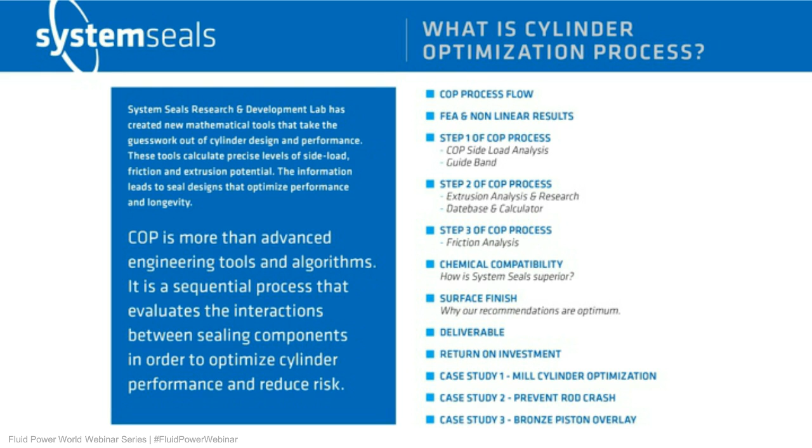So let's take a look at what the basic flow is for the cylinder optimization process. The first step is that we need some information from our customers, usually a dimensionalized AutoCAD drawing. This would include all of the dimensions related to the cylinder, the piston, the rod, and any existing sealing components or guidance components.

And then something that we call the stamps. So this would be the speed, temperature, application, media or fluid, the pressure, and the size of the application.

And from this, we're able to put these variables into our first calculation, which is a side load calculator. This calculator allows us to determine what the side load is in the system and how we can appropriately distribute that load across the bearing components within the cylinder in order to minimize risks.

After we perform the side load analysis, we move on to something called an extrusion analysis. We're trying to understand which seals or materials should be used for the respective sealing components in order to ensure that they don't extrude under the system gaps and under the system pressures.

After those seals have been selected, we can move on to a friction analysis. And after the materials have been selected based on the friction analysis and the extrusion analysis, we can also complete a chemical compatibility investigation. We'll talk a little bit more about how this chemical compatibility investigation is broader and more thorough than what you typically would encounter in standard material investigations.

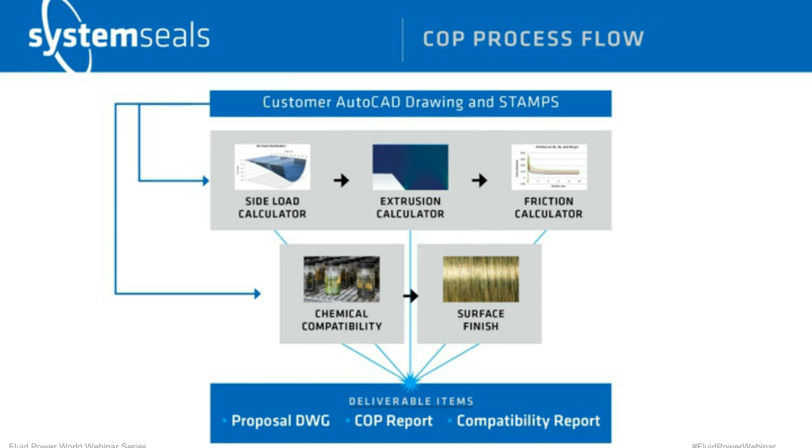So why do we need to do a side load analysis in the first place?

If we look at this diagram in the left-hand corner of the slide, we see that the traditional method for sizing guide bands involves simply assuming a load, a force that's being applied to the guide band. Although the guide band is circular, the assumption is made that the load distributes evenly and linearly across a rectangular projection of that guide band.

It effectively takes a 3D circle, projects it down to a two-dimensional surface, and then distributes that load over that area. And as long as the area is large enough to carry the load without exceeding some maximum specified stress value, traditionally the guidance system would have been determined to be acceptable.

There's a couple of problems with this particular method. First of all, it assumes the side load. In many cases, the designer is asking the customer, what is the side load for your cylinder application?

And the end user's response is oftentimes, I don't know, maybe it's 2% of the drive load, is it 5% of the drive load, I'm not really sure. And so now the engineering team has to make some assumptions.

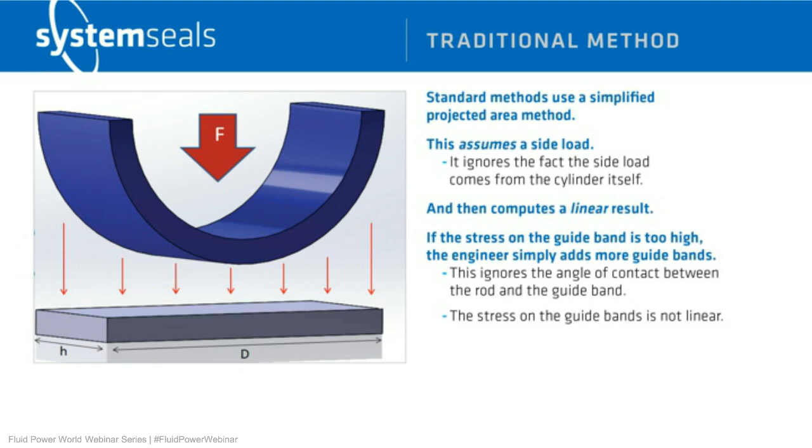The upper left image on this slide shows us a semi-section of a guide band. You can imagine a rod resting on that guide band. But if you notice, the area of maximum stress is around the 6 o'clock position in the front of the guide band. That's because that's the area that sees the most stress.

And because the angle of contact between the rod and the guide band is on an angle, not flat, moving from the front of the guide band to the rear of the guide band, the stress decreases according to the curvature of the rod.

Moving from the 6 o'clock position to the 3 o'clock position, or symmetrically to the 9 o'clock position, the stress also decreases nonlinearly because we're dealing with a circle.

This is why the traditional method doesn't work very well, because it doesn't capture this behavior. So one way to get to how this stress distribution looks is to run an FEA analysis.

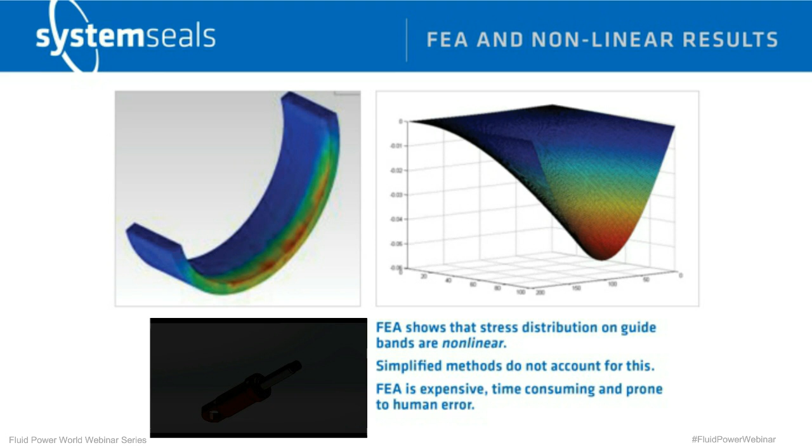Let's take a look at a video that shows us what this FEA analysis reveals regarding the nonlinear stress distribution on guidance components.

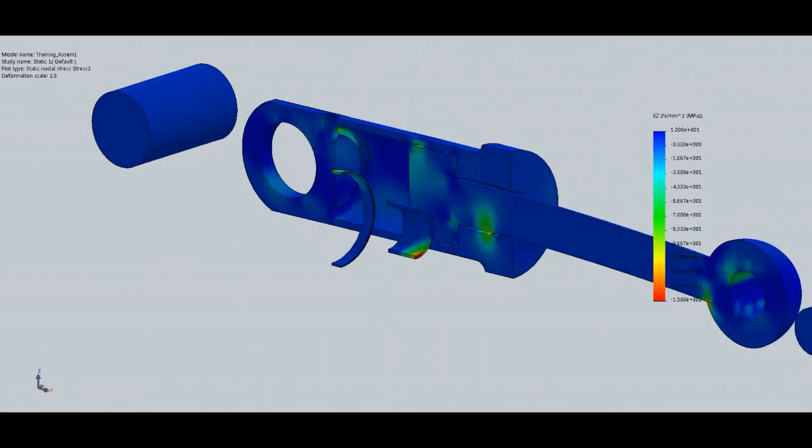We're looking at a sectioned view of a hydraulic cylinder with spherical bearing ends, and for an exaggerated purpose, we are increasing the frictional torque that would occur at those bearings when the cylinder drives. What you observe is this nonlinear stress distribution being superimposed on the guidance components. It occurs on the rod guide band, so this would be the larger guide band in the front. And again, you can see at the 6 o'clock position in the front is where the majority of the stress occurs.

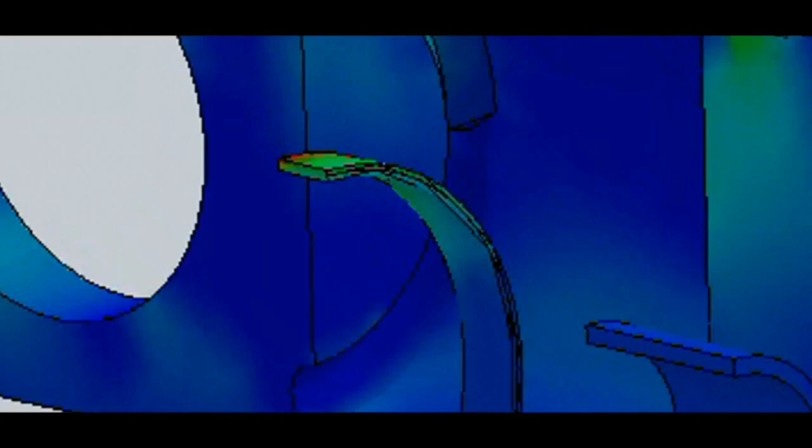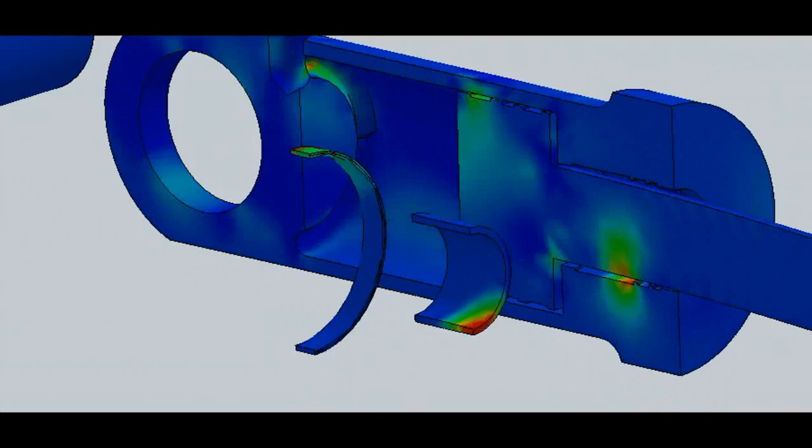It also occurs on the piston guidance component, but to a lesser degree, because the piston generally keeps the system flatter in that region of the cylinder. So here we see the nonlinear stress distribution each time the cylinder would stroke or experience a bending load.

The problem with FEA is that it's expensive and it's time consuming, and depending on what assumptions are made with an FEA analysis, for the same exact cylinder, sometimes you can get differing results depending on who is doing the FEA analysis or what parameters are selected.

So to get around the problems with time, expense, and user variability, we've developed a COP side load calculator. What this calculator does is, first and foremost, calculate the side load that the cylinder is experiencing based on the operating parameters and geometry of the cylinder. So instead of us asking for information about what the side load is, based on the application and the cylinder geometry, we can tell you what that side load is going to be.

Once we have that side load figured out, we're able to calculate the nonlinear stress distribution on the individual guidance components. We're able to optimize the number, the size, and the specific material for each guide band, determine the friction from each of the guidance components, and also determine the bending that the cylinder rod undergoes when it's experiencing this side load at the interface at the end of the rod.

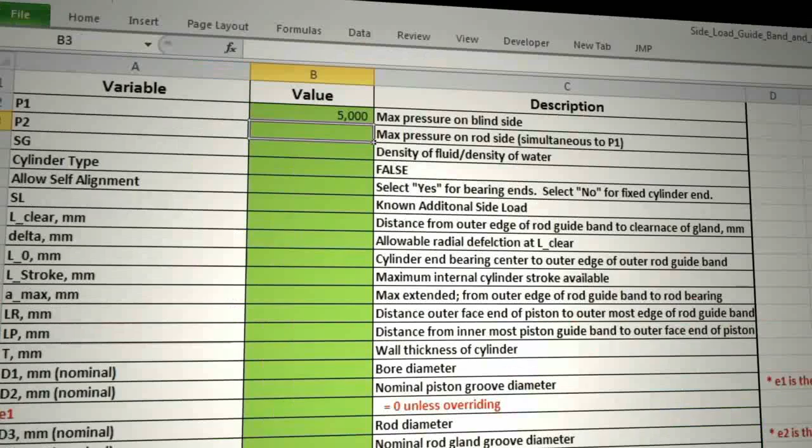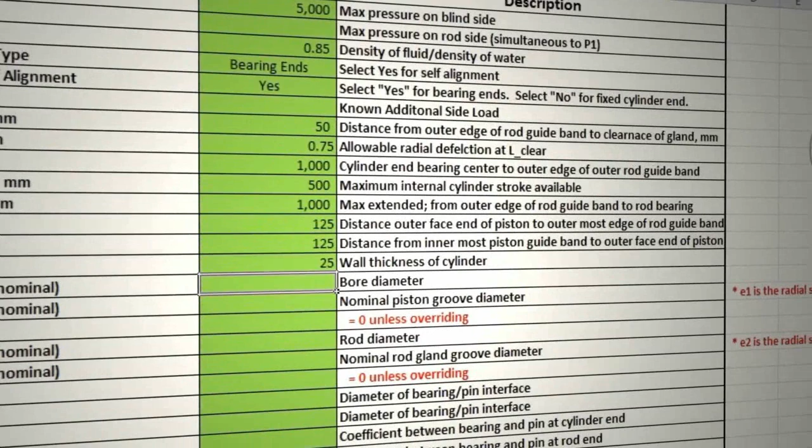Let's take a quick look at a demonstration of this calculator and see how it works. The first thing you'll notice is that the engineer is going to enter inputs into this calculator that relate to the dimensions and operating parameters of the cylinder: fluid type, density, material conditions, geometric representations and dimensions of the cylinder.

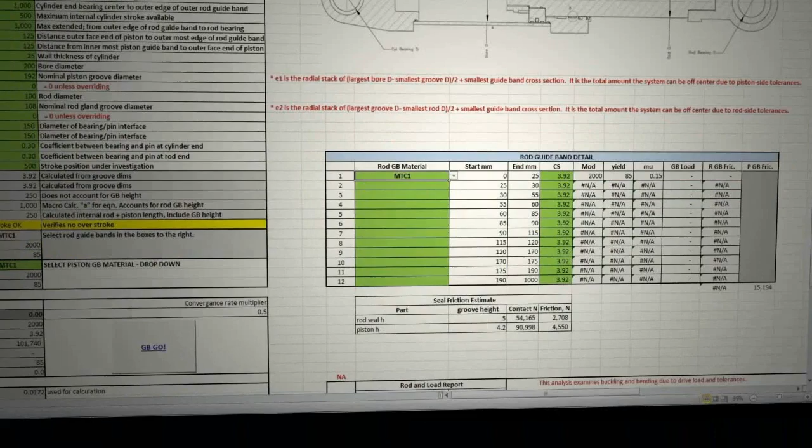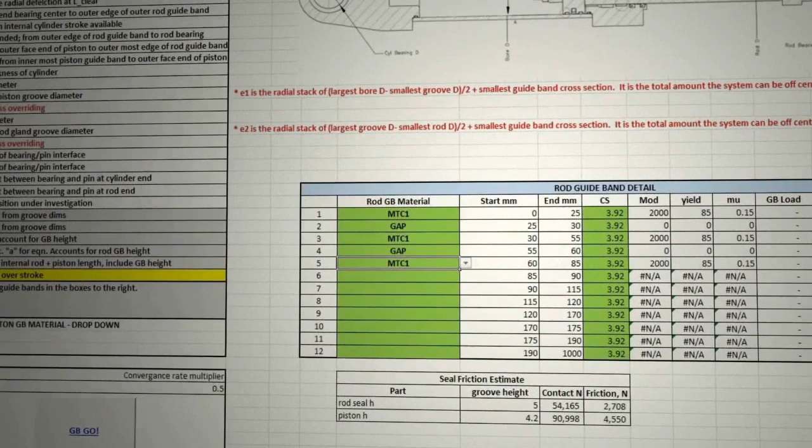Once all that information is entered, the engineer can now choose a starting guide band package. We don't know what the optimum package is yet, so we have to start somewhere. We choose a traditional guidance package, traditional sizes, traditional spacing.

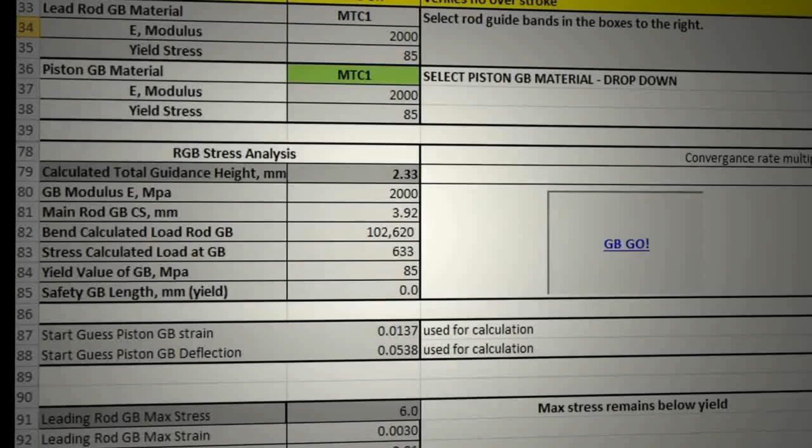Once those components have been selected, the engineer will now run the GB GO analysis. They engage an iterative solver which winds up a solution. It hunts and converges for the solution for the nonlinear stress distribution over the guide bands.

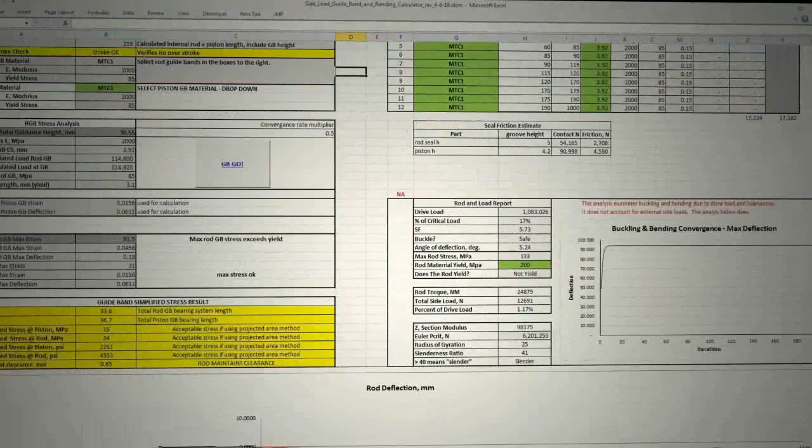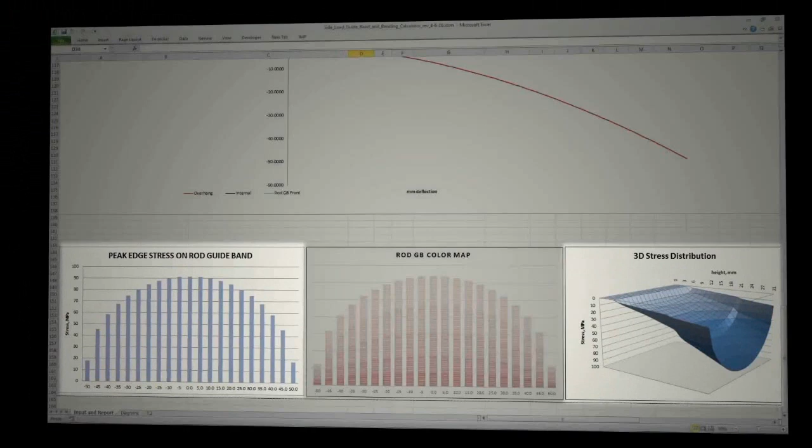Once that solution is found, the engineer is able to read off a number of outputs from this calculator. First of all, and again in this particular example it's exaggerated, we can see what the bending or deflection is going to be across the entire length of the cylinder. That shape is superimposed over the guide bands, and so we get two stress distributions: a projected nonlinear stress distribution over the guide band and the 3D stress distribution that the guidance components carry.

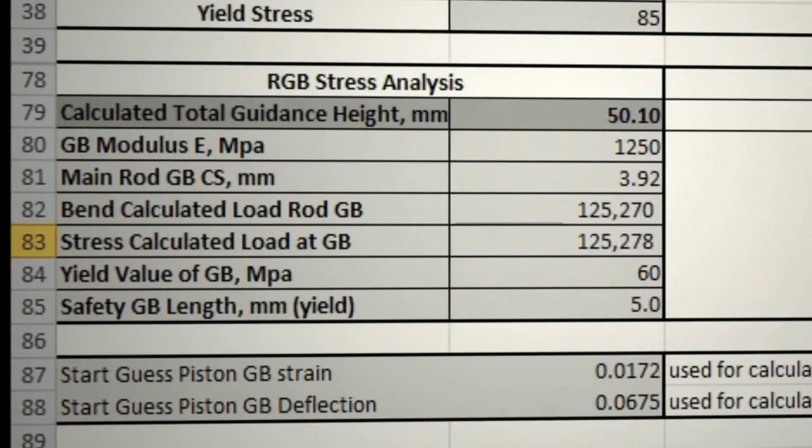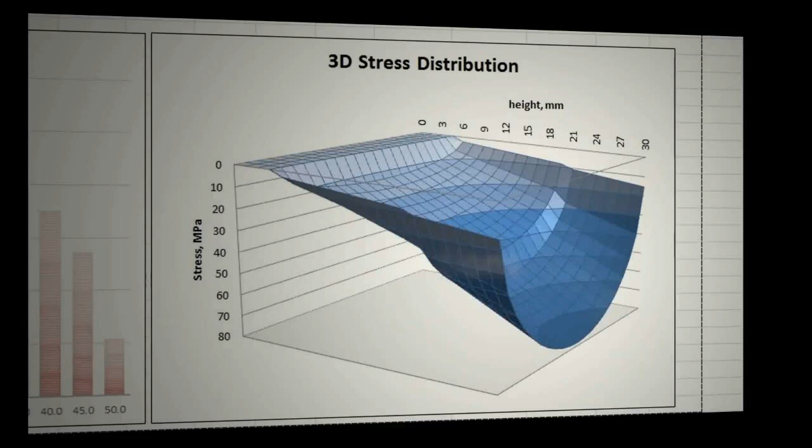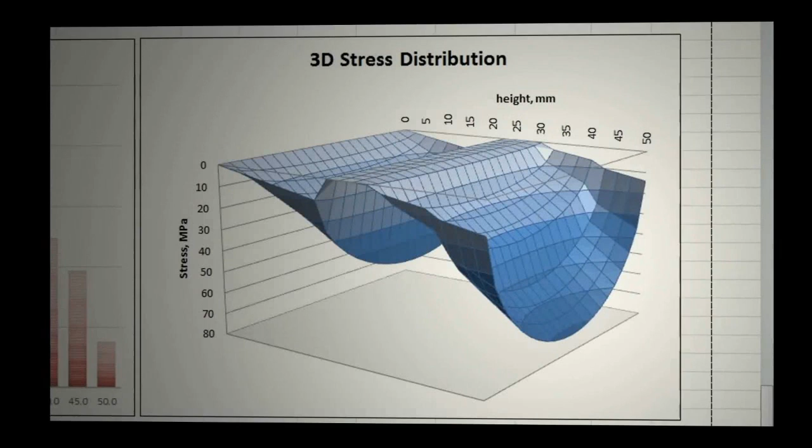Now, in this particular example, the guidance system was not optimized, and so the engineer changes some of the parameters, including material and sizes, reruns the analysis, and evenly distributes the load over two guidance components. In doing so, after a number of iterations through this program, we achieve what's called an optimized guidance system. Once the system is optimized, we feel that the material will not yield, that the load is being evenly distributed. We can now settle in on the guidance package that would go into the cylinder.

So why do we have to do this first? Take a look back at the previous slides. One of the key outputs, in the upper left-hand corner, we see this box of 3 guide bands where the load is being distributed over those 3 guide bands in a curvilinear fashion.

So that's an important output for us. It tells us to use 3 guide bands, and it tells us that the maximum stress at the 6 o'clock position is going to be roughly 80. That's okay for this material. It's selected, and it shows us how the stress distribution is going to taper off over the full length of those 3 guide bands chosen.

It also tells us that if we had any additional guide bands internal, so working inwards into the cylinder, they won't actually do much to carry the load.

But a critical output that we get out of this calculator is something called deflection at clearance. So our engineer can specify a clearance position within this cylinder, and we can determine what is the deflection of the rod, the whole system, as it moves off the center line.

This is important for at least 2 reasons. First of all, it allows us to investigate whether or not the rod is going to crash into the rod gland or if the piston is going to crash into the cylinder body.

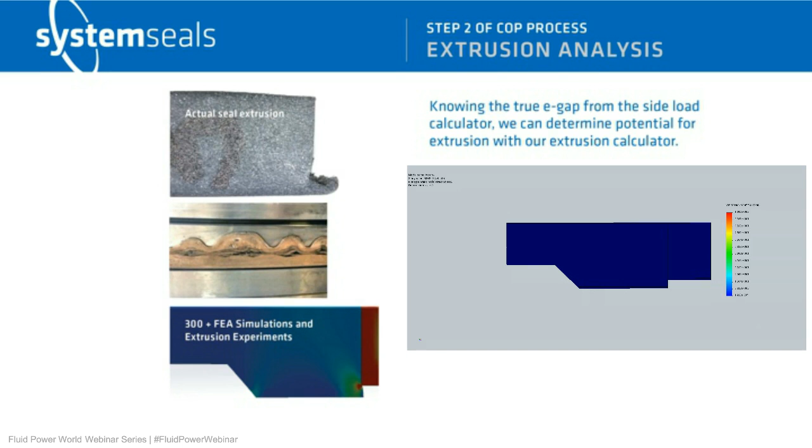So if we take a look at a graph of the output of this particular calculator that we use, the black line represents the extrusion potential, or the stress, the von Mises stress, within the material that's chosen as a seal. Along the x-axis, we have the radial E-gap, so this would be the extrusion gap. And along the y-axis, we have the stress.

The red line and the yellow-orange line represent limits at different temperature conditions. So for example, at 25 degrees Celsius, this particular material, at 60 degrees C and 69 megapascals of pressure, can see an extrusion gap of up to 3/4 of a millimeter before extrusion is a risk.

That's at 25 degrees Celsius. If that material or application heats up to 60 degrees Celsius, that limit is derated according to the material properties, since we know material properties change as a function of temperature. We use a DMA, a dynamic mechanical analyzer, in our laboratory to determine how to derate these materials as a function of temperature.

In this case, at 60 degrees Celsius, this calculator tells us that extrusion will actually onset closer to 0.6 millimeters. So we have a couple of options: redesign the sealing package, select a different material, or install an anti-extrusion backup ring. But we couldn't perform this step until we understood the true extrusion gap obtained from the bearing calculation we did initially.

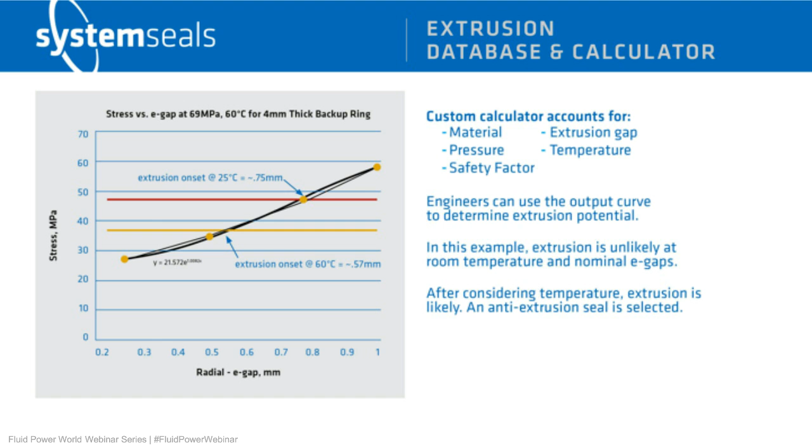Once this step is complete, we're able to move on to a friction analysis because we've selected the seals, we know what materials the seals will be made of, and what pressures the system will be under. We can use research and testing performed in our lab to predict what the friction will be in the system.

If we look at the graph in the upper right-hand corner of this slide, contrary to what we learn in most textbooks on basic friction, the coefficient of friction is actually not a constant. We know that as plastics and elastomers deform and start to conform around the sealing surface, coefficient of friction changes. In fact, it actually reduces.

So we've developed another calculator, based on a series of experiments conducted in our lab, that for a given seal package, material, and set of operating conditions, predicts the amount of friction that seal package will generate as a function of applied pressure. When we run this analysis, we account for the fact that the coefficient of friction is actually a function that decreases with contact pressure.

Now, after the seals have been selected and the friction analysis has been performed, the question remains: will the seals that have been selected function within the chemical or fluid that they're supposed to be sealing?

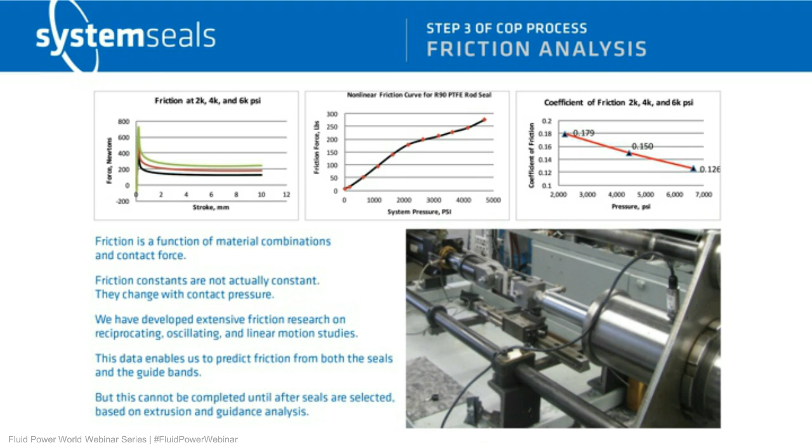In order to answer this question, we've developed a fluid compatibility test program. It's a little different than the programs you'll see in a standard hydraulic fluid sell sheet or material sell sheet. For example, a lot of the standards that exist today range from 7 days up to maybe 28 days, or 1,000 hours at a maximum.

But what we've found in our testing over a number of years is that with durations of this length, there's a high rate of false positives, somewhere between 15 and 25%. That means 15 to 25% of the material options concluded to be compatible would, in fact, be shown to not be compatible if we did a longer investigation.

If we look at one quick example, over 7 days the change in one particular tensile property increased by about 10%, and then reduced back down to 0% - effectively no change. Based on a 7-day test, we would say this is compatible.

But if we look at the results over 90 days, we see that even at the 1 month mark, 28 days, the property has only changed by negative 20%. According to a 28-day test, this material fluid combination would still be deemed compatible. But looking at the curve over 90 days, there's a continual downward trend, and this property drops off to almost 50% of its original value.

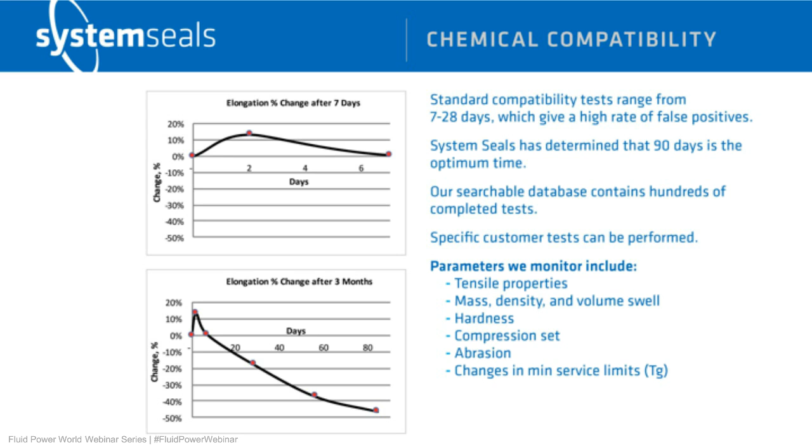So at this point, we've done a bearing calculation. We've optimized the guidance components. We have optimized the sealing components based on an extrusion analysis. We've performed a friction analysis. And now we've determined chemical compatibility as a part of this process.

The final step in this process is to recommend surface finish parameters. So traditionally on engineering drawings for sealing components, we'll often encounter one specified variable, which is the RA, which is effectively a statistical average of the surface profile.

But what we found in various surface finish experiments in our lab is that a number of other parameters matter. They're statistically significant. So for example, the RZ, the RT, and the bearing ratio have also shown themselves to be significant and important predictors for seal wear and for sealability in the long term.

So with our laboratory equipment, we can actually specify and measure up to 9 independent surface finish parameters. But again, we typically think that these 4 are the ones that matter the most.

And beyond the standard research that we've performed on chromed rods, stainless steel rods, we've also done some investigation on advanced material coatings. For example, in AGC or steel mill applications, a lot of times chrome is starting to be considered environmentally unfriendly. And so exotic coatings such as ceramic have been investigated, and we have surface finish recommendations, material combination recommendations that relate to exotic coatings such as ceramic as well, that have all come out of this surface finish research. And so this gets wrapped into the COP process as a final recommendation.

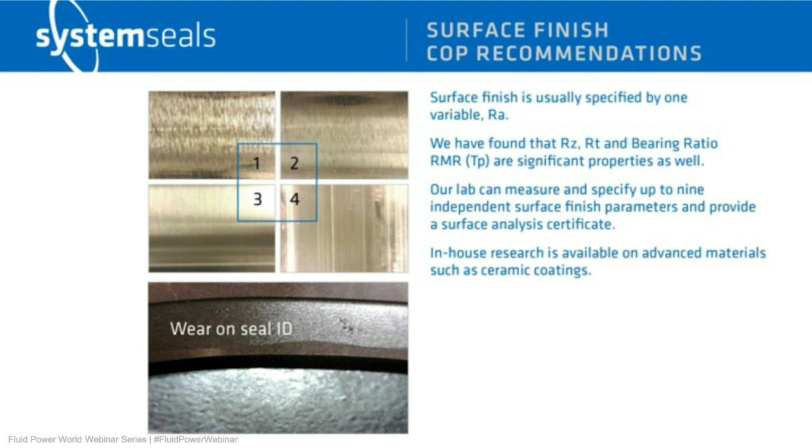This usually ends up either in the COP booklet that is provided as an end result of this analysis, or it ends up on the proposal drawing with these parameters specified.

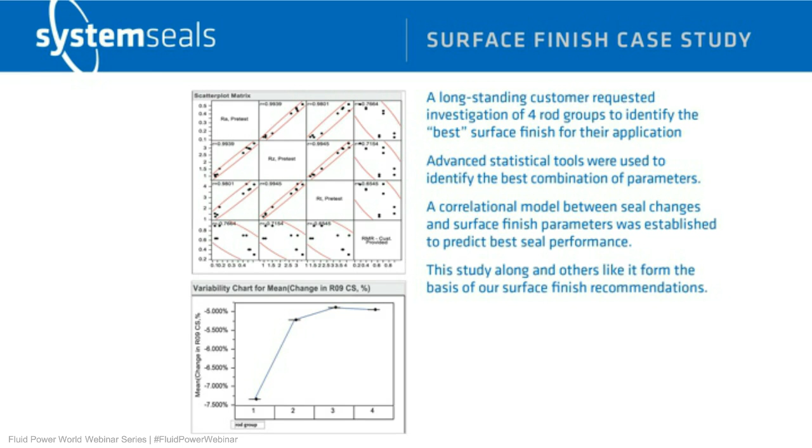Okay, so as I mentioned previously, the end result of this COP process is a deliverable. This deliverable is a booklet that includes the analysis for the bearings, the extrusion analysis, the friction, chemical compatibility, surface finish recommendations, and the proposal drawing for the seal package that has now been optimized for that cylinder application.

So what's the value for this kind of optimization program? Because we're talking about taking seal designs that work. We're not saying that a lot of these seal designs necessarily don't work. They do, but we're improving or optimizing a certain parameter, seal life, wear, and in this case, we feel that there is a reduced cost of ownership because we can reduce downtime, lower maintenance costs.

We can lower the costs associated with replacing seals prematurely. If there are oil leaks being encountered because the seal package is actually not working, there may be savings in disposal and cleanup costs, especially for large-scale operations, and of course, an output in productivity and a long-term reduction in the cost of seals.

Now, we can say this, but we feel that this is best highlighted if we show a few case studies, real-life examples where we've put this COP process into practice. So let's take a look at our first case study.

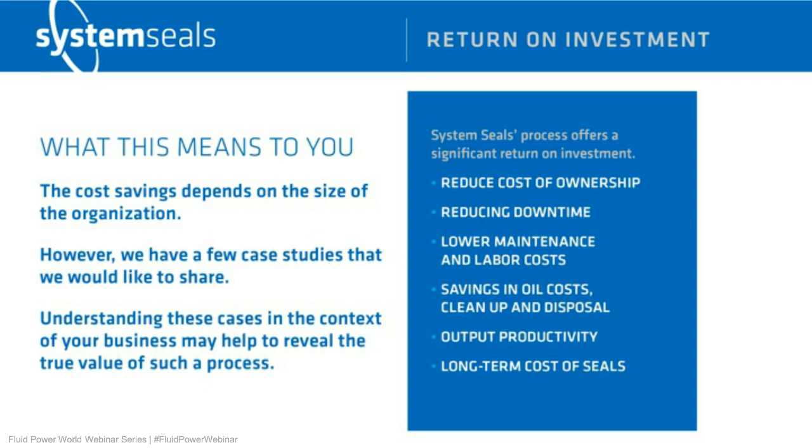This was for a mill cylinder optimization project. This was a steel mill. There was a bending block, a block that bends steel, and there are large hydraulic cylinders that apply force to bend it. The AGC OEM manufacturer was required to reduce the physical size of the cylinder in order to fit it into the physical constraints of the plant.

So we used this optimization process to first investigate the existing design. We put the existing design into our calculator, 4 guide bands in this particular case. The calculator ran through, determined what the loads would be based on the operating conditions, and determined that only 2 guide bands actually needed to be installed in this gland to safely carry the load.

So why were we using 4? That was the design that was originally supplied. Something isn't broke, don't fix it. But in this case, we wanted to optimize it, and so we were able to safely remove the interior 2 guide bands, still safely carry the load, and distribute that load evenly over those guide bands.

As a result, we reduced the gland height by 30%, which allowed the OEM to meet their target to get the cylinder to fit into the geometric constraints they needed. And of course, because we're shrinking the size of the cylinder, there are some material cost savings, some shipping cost savings, some softer savings along those lines as well.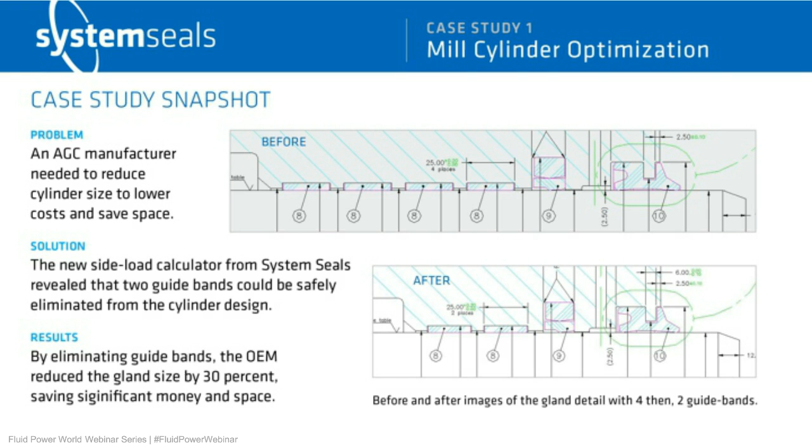All right, so let's take a look at another example. Here's an example where we use this bearing calculator retroactively, as a diagnostic tool.

So we ran the COP analysis on the current design. The COP calculator accurately predicted that the rod would in fact crash under those operating conditions, so it confirmed what was being seen already in the field.

We were then able to use the COP calculator, this bearing calculator, for the engineer to reposition some of the guidance components, change some of the materials, change some of the sizes of these guidance components, and in doing so, rebalance the load and prevent rod crashing from occurring.

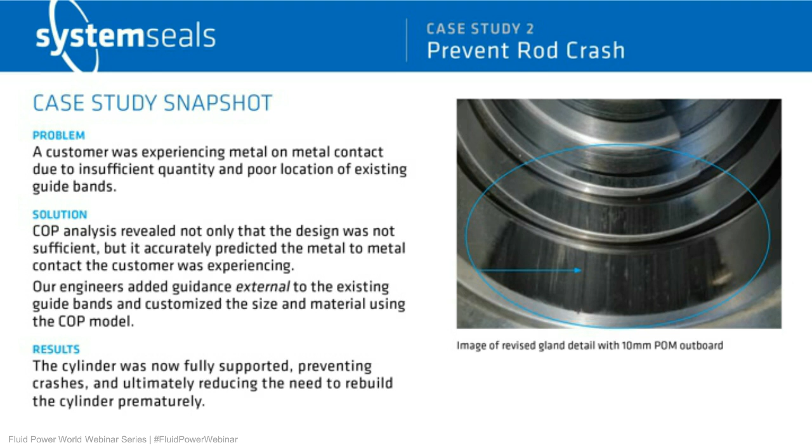So now the cylinder was fully supported, ultimately reducing the need to rebuild the cylinder prematurely due to this type of failure. Of course, we feel that if this analysis were performed at the beginning of the design process, this problem would have never been encountered in the first place.

Our third and final case study is something that cylinder rebuild shops encounter often. They rebuild cylinders, and a lot of these cylinders have bronze components either in the rod gland or in the piston location. The piston is covered in bronze, called a bronze overlay. And every time the cylinder is rebuilt, the bronze overlay has to be machined down and rebronzed so that the cylinder can go back into service.

So we ran the analysis and found that although we still needed to keep bronze in the rod gland, the piston did not need bronze in order to carry the load. In fact, we could get away with using composite bearings, cutting grooves into the existing piston, and simply replacing composite bearings as they wore out.

So what this optimization project did was effectively reduce the cost of maintenance and repair each time the cylinder was brought in. It wasn't failing, but the maintenance costs were high because of the bronze overlay. Now that step has been eliminated from the piston side of this cylinder, because we were able to accurately determine, using these calculation tools, that polyester composite guidance components would carry the load on the piston side of the cylinder without causing a failure.

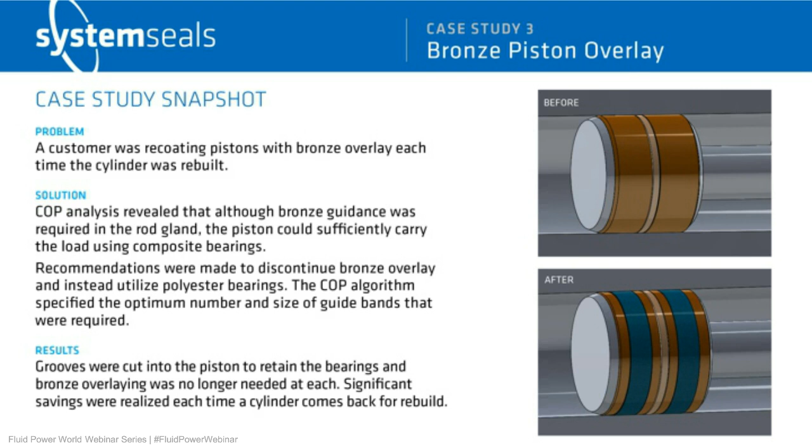So that's the overall summary of the cylinder optimization process.